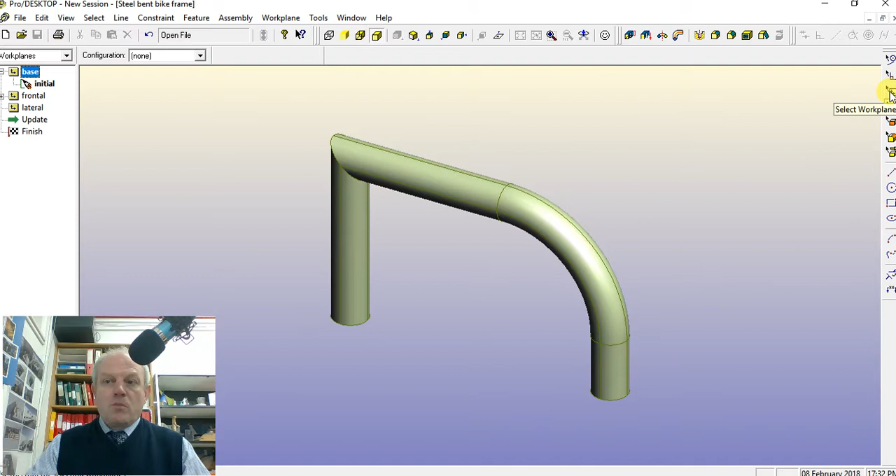In this tutorial, if we open an existing file, something like this, and we wanted to add another drawing to complement it, you'd have to check which of the work planes you were on. When it turns on, the base is highlighted, so if you click on the plus, the initial is the highlighted first drawing I've done there. You can see that from the work planes over here - there's the base, and that one is the frontal one.

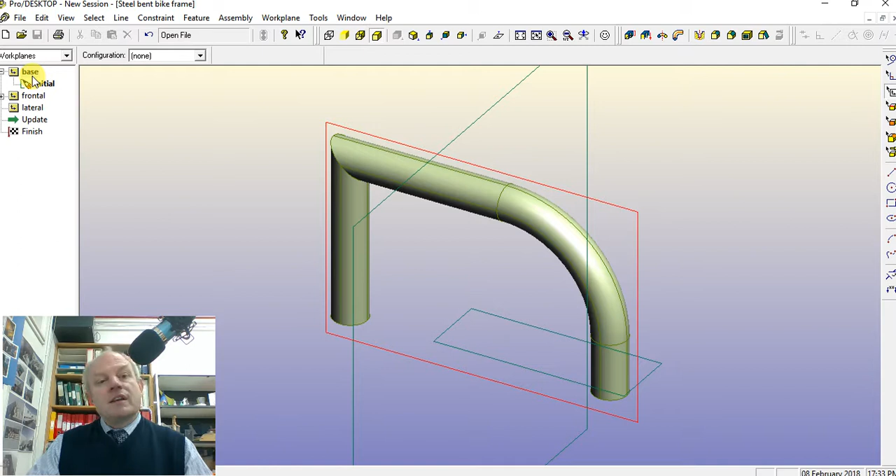What I want to do is build a tall stick to make a canopy. So to do something different in height, you really need to build a new sketch. So if I call this pole, tip it up with the white L, I should be able to draw up a couple of sticks.

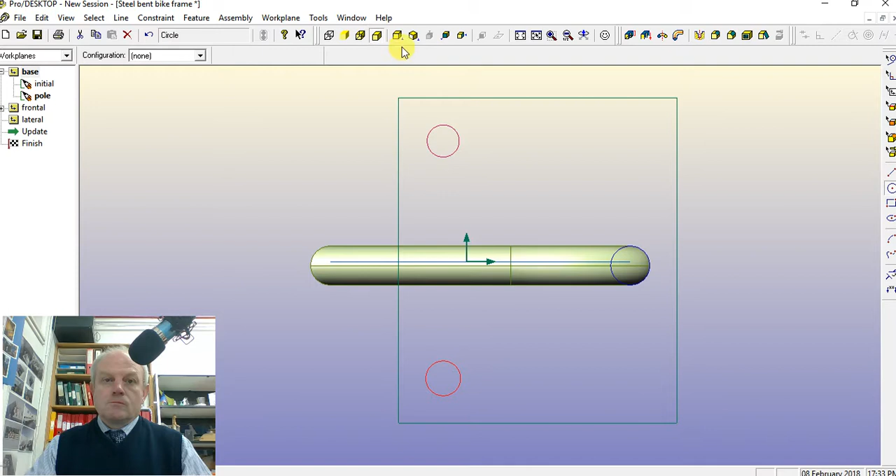View isometric, extrude it with the first of the red hollow blocks. It wants to be nice and tall so the person walking underneath this doesn't bang their head. So I can use that yellow dot.

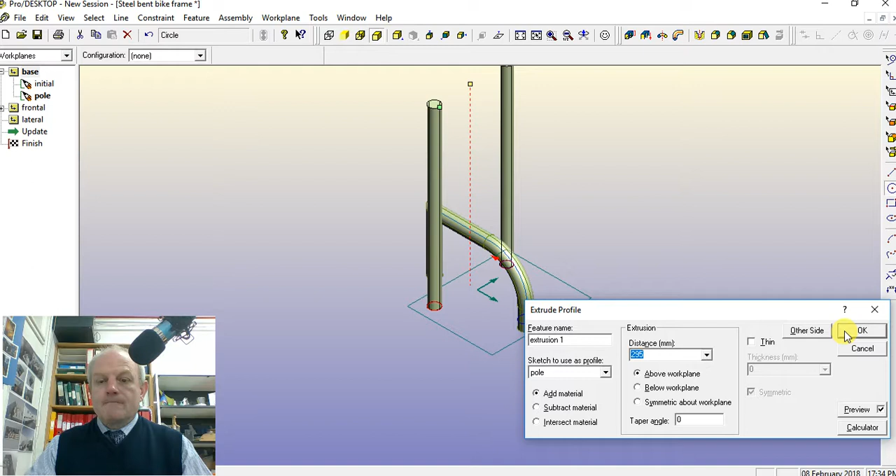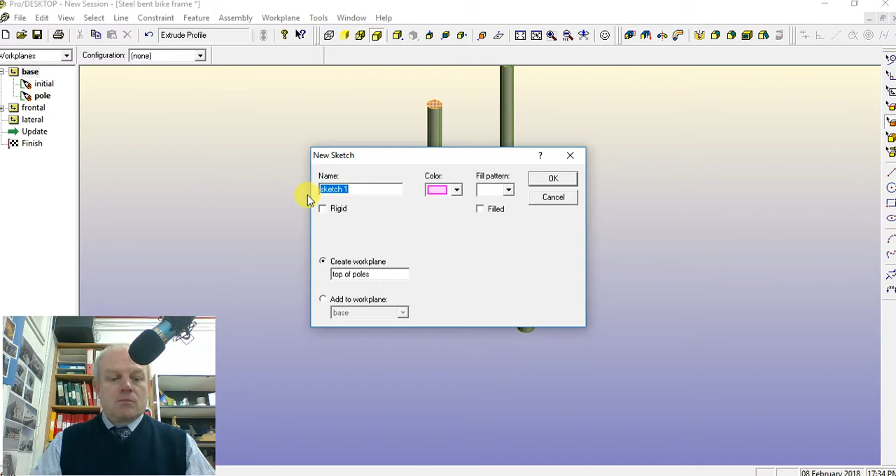Say OK. To build the canopy on the top now, select a face - in this case the very top of the poles. Look how it turns turquoise. Click on it, right click the mouse. You can jump straight to new sketch and it will offer you a new work plane title, so we'll call it top of poles, and the sketch will become the roof.

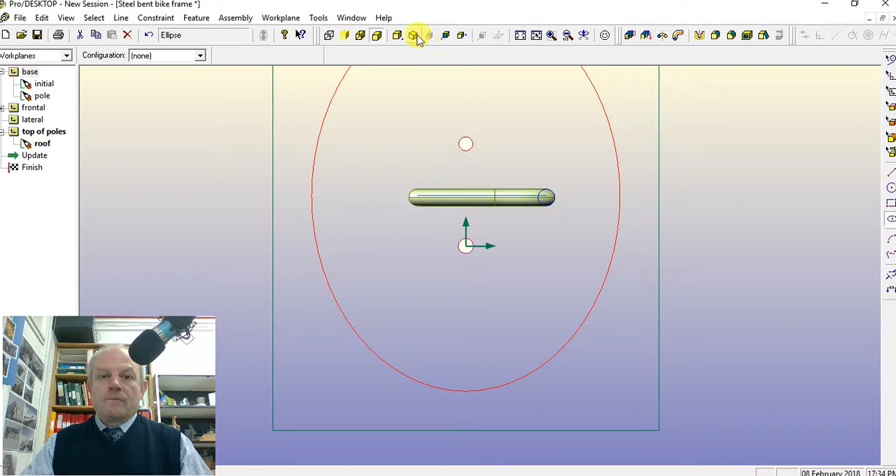Say OK, that appears over here on the left. If you open the plus, you can see the roof pencil. So when you tip it up with the white L and you draw, let's say, an ellipse, start pretty much centered.

There would be a large canopy now over this bicycle rack. Need to give it thickness, so let's extrude it. Something shallow, just 10, 12, that's perfect.

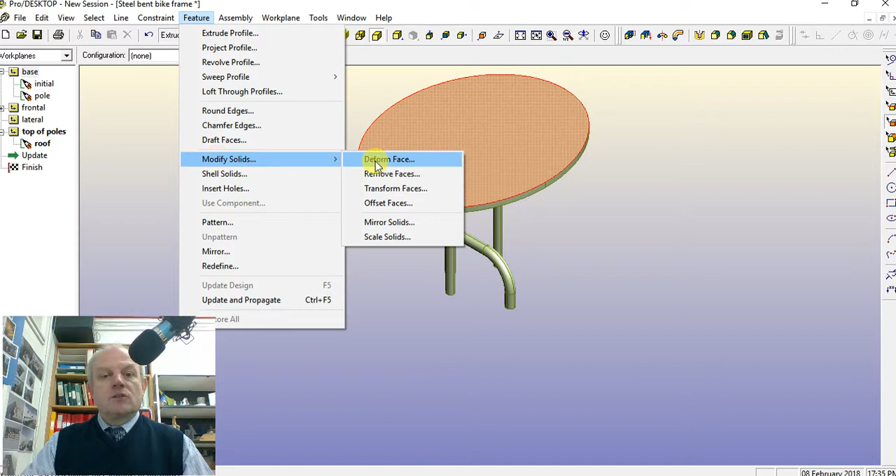Say OK. Looks a bit flat and the water would gather on the top of that. So if we were to select the top face of that, there's a nice function over here where you can modify solids. If you click on deform face, don't go too crazy, just grab that dot and pull it a tad, see what happens, touch the space bar. You've now given that a little dome top to it, so it makes it a bit more of an elegant bike rack, supported on legs and giving protection from the rain.

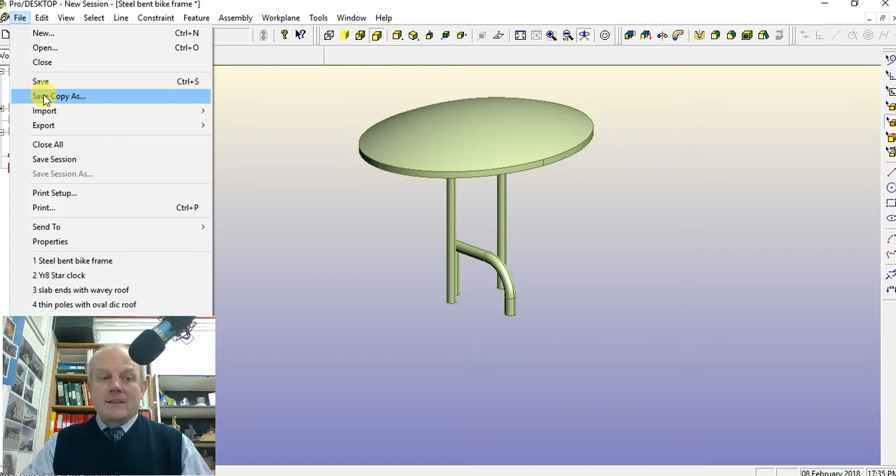Don't forget to save your work, and save copy as this time - it's important. If you just save it, you'll copy over the original frame drawing and you can't go back so easily to change it. If you save copy as, give it a different name, so this would be steel bent bike frame with roof. As the title gets longer, you'll know when you go looking at your files which one it is you'll need to get.

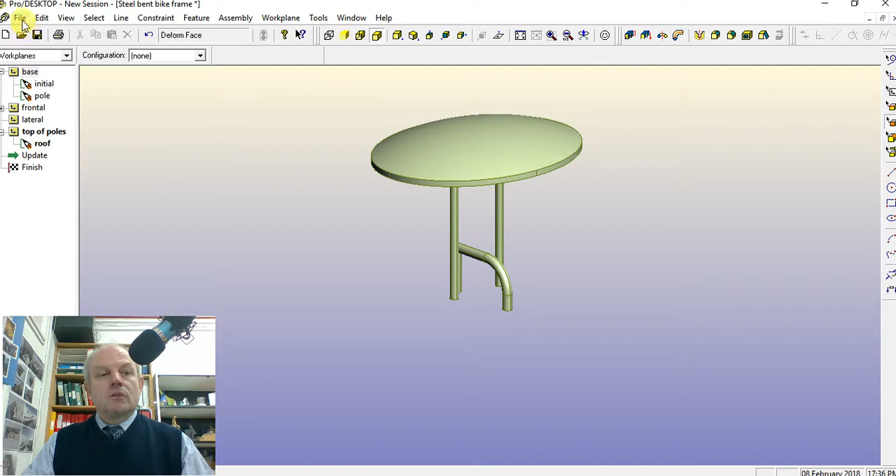Because I've done this as two parts, if I go File, New, go to the Album section, I can then open that, and in that you go to Image, New Image, and there is only one thing there, but if you select which one you want, say Open, and then it drops.

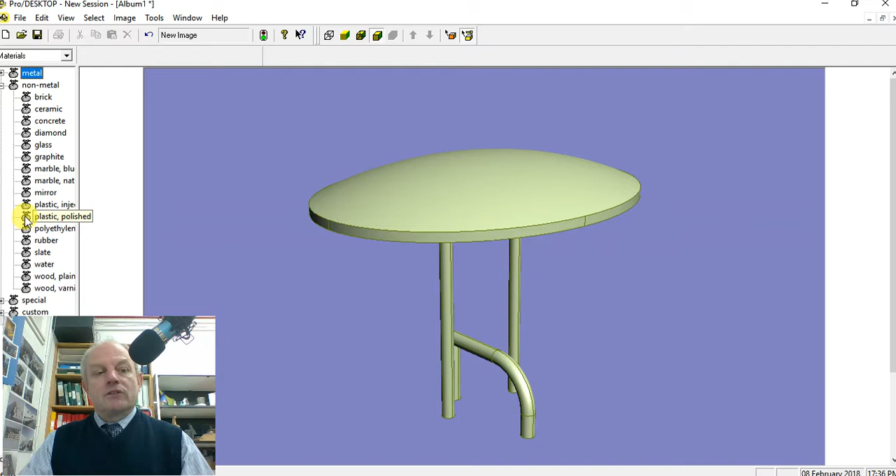You can then manipulate this by pulling down the materials chart. If you wanted non-metals, click on the plus, and down there some nice woods and some plastics. Don't click on the word, click on the bag of coins. Keep your finger depressed, drag onto the item. Again, when it turns turquoise, that's the clue that it's talking to that bit.

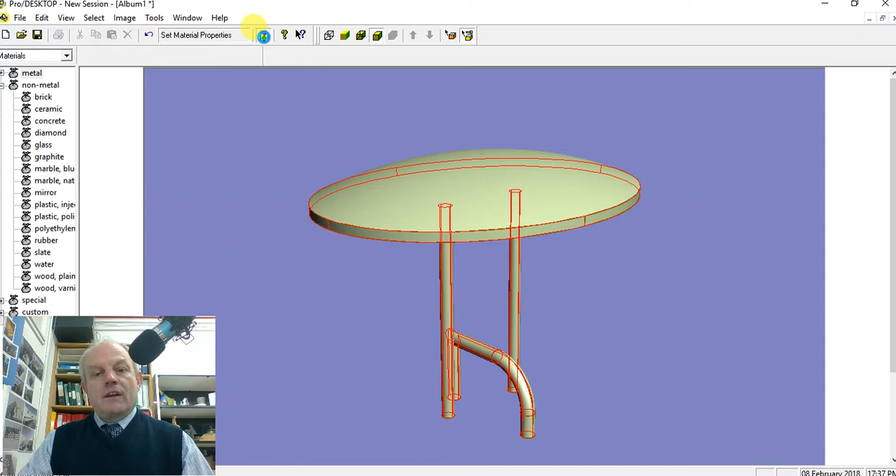Before you push update, right click the mouse, set material property, get a chance to set the colors. Choose a nice loud color, limey green, say OK, say OK, green traffic light, and the whole project will turn bright green. When you go to save this file, it's better to export it than save it.

Save it as a JPEG, save it in your area, give it a name that you'll recognize so you can come back to it later. That'll be important when you drop it into your 2D design.